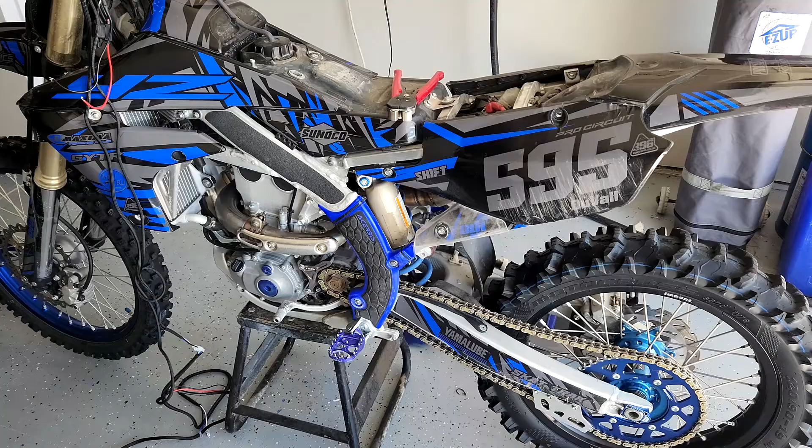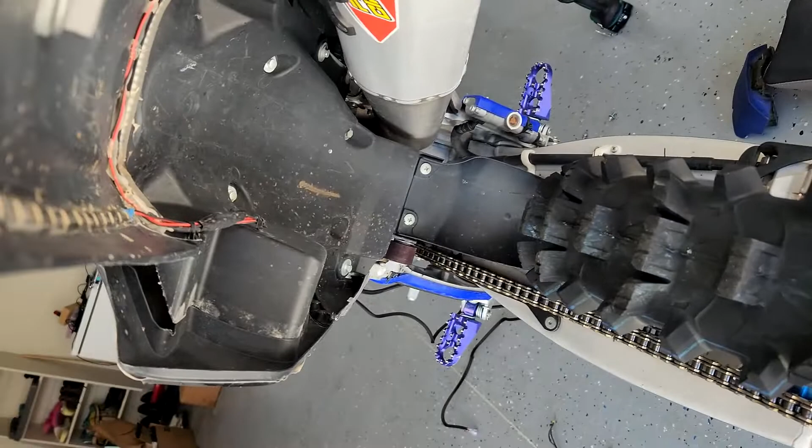I'm in the process of tearing out the old StreetFighter harness, just snipping wires and plugging away trying to get rid of that stuff. I've still got to rip out my old tail light and everything, which has held on there pretty decent, surprisingly, even at the dunes. But some of these lights are starting to fall off, so I'm basically going to go through and tidy everything up.

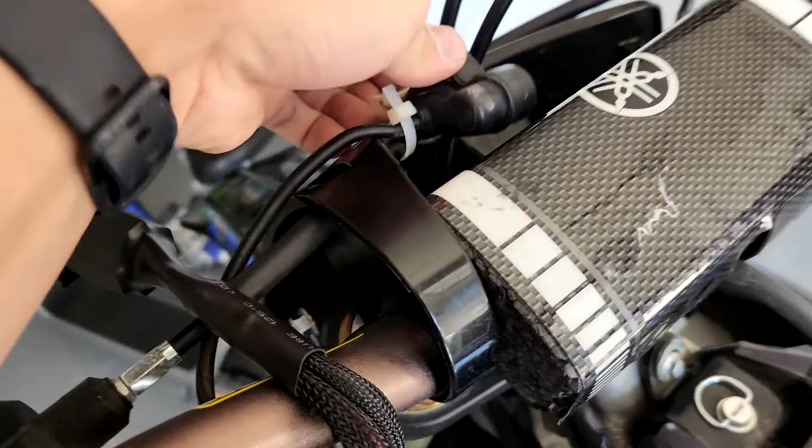Obviously this switch here is all jacked up too, the button doesn't work on it anymore. I can't turn it on and off hardly, so I just zip tied it out of the way because I was starting to run into it with my hand.

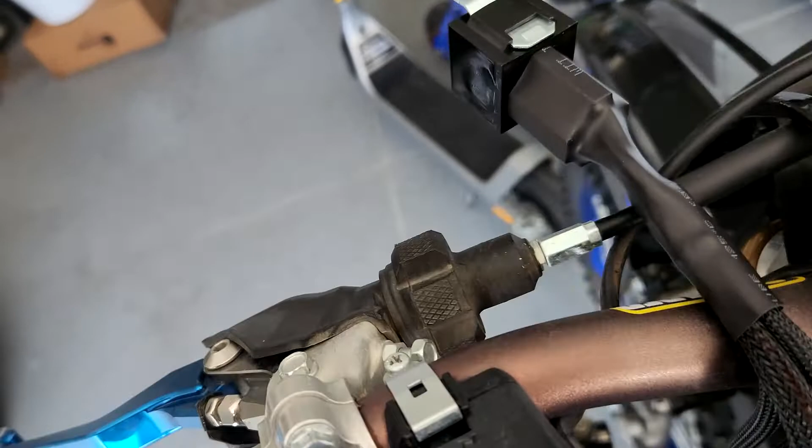There's a few things I want to improve upon that are problems in the StreetFighter kit. All of the connectors that hooked onto everything were just a rat's nest. These connectors broke off, so I had to cut them apart and solder them while I was on a ride out somewhere. It's just cheap connectors, cheap design - you can tell it's definitely just a made in China type thing.

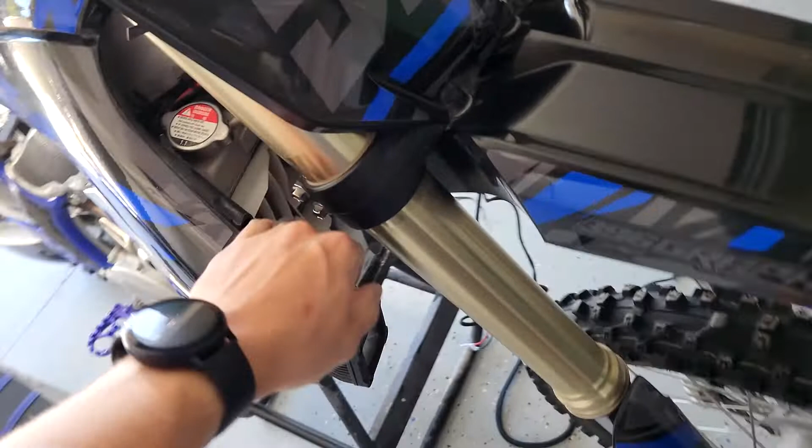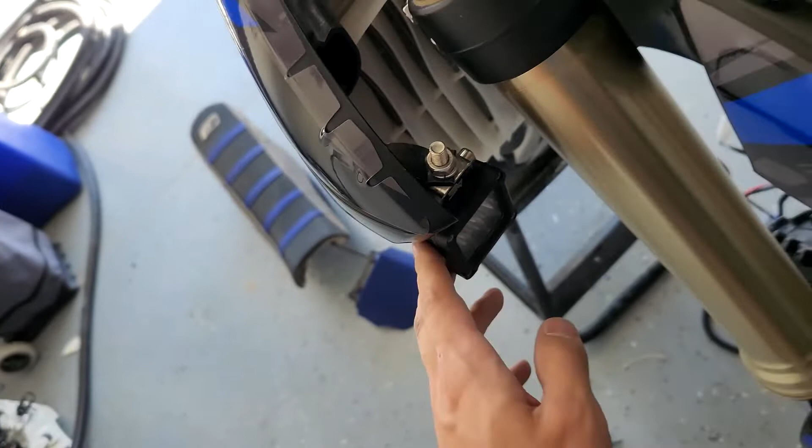So I'm going to redo it, make it look a lot better, a lot nicer. I'm going to start by pulling off everything I need to get to where all my other stuff is, like pulling off this radiator shroud. I'm also replacing these lights with something else, and I have a more permanent mounting solution than before, which was reusing the strap on these lights. After a while I've figured a few things out, and I'm going to replace everything with better components, hopefully it lasts me a lot longer.

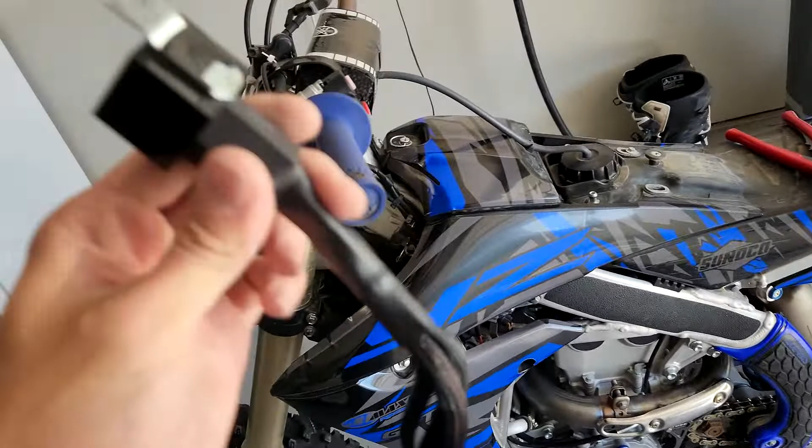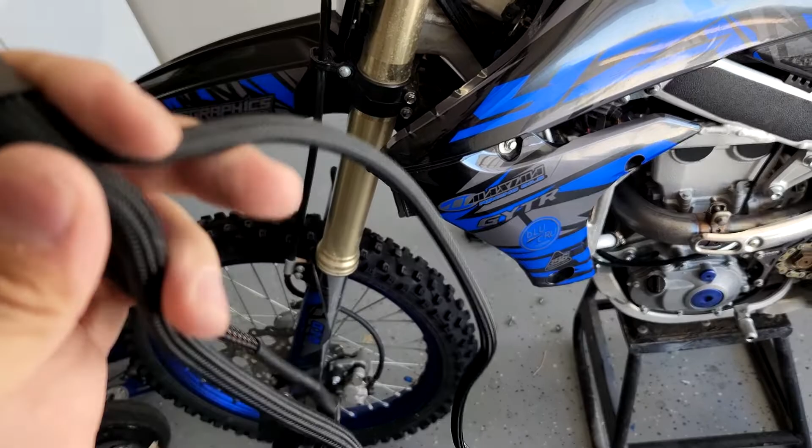This wiring harness I got, it's even got a relay, and everything's braided - it's going to be super nice. All the connectors are mostly already on there. It's a lot thicker than the other one, but it's a lot higher quality too, so I don't mind taking off an extra couple bolts to lift up my gas tank and wedge these wires underneath there to go all the way up to the handlebars.

But anyway, I'll take you along for the ride.

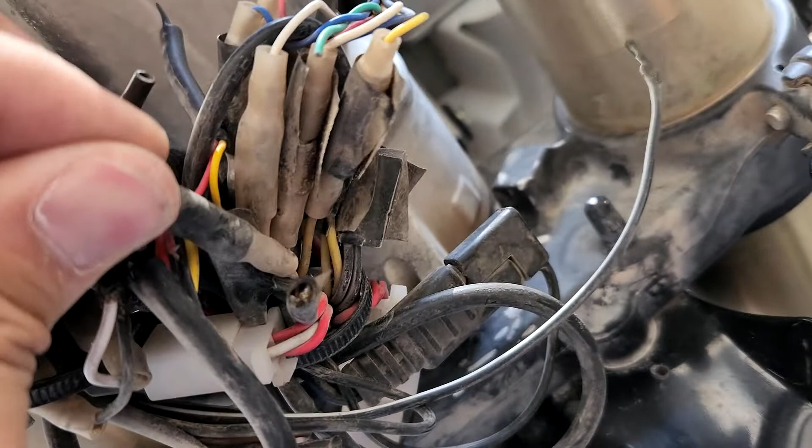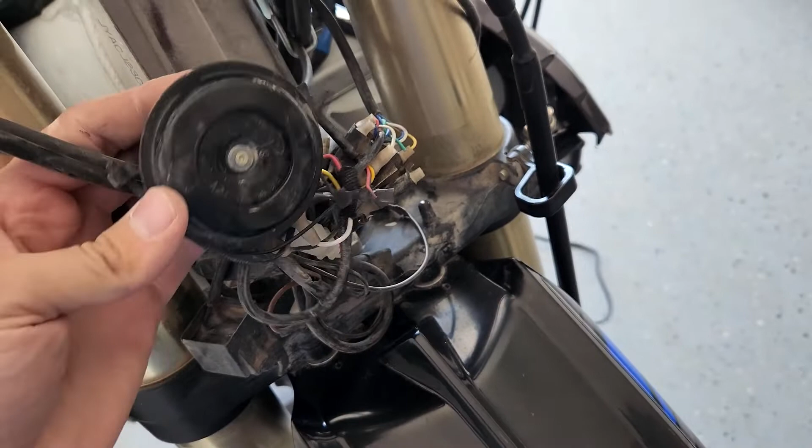This is why I can't recommend the StreetFighter harness to anybody. Look at this wire right here - these stupid bullet connectors that I had to tape together to keep them from coming apart, and it just broke right off. It's just not ideal, there's so much bulk, and it's just ugly, you know what I mean? I had to zip tie the horn on here too to get it to stay, because it broke off a couple times.

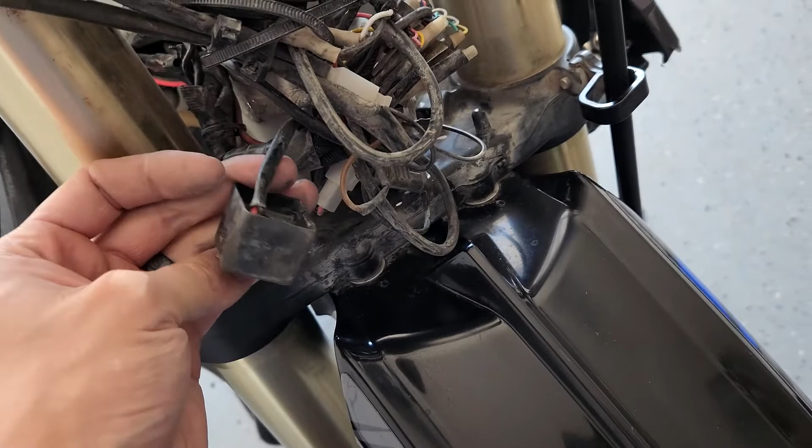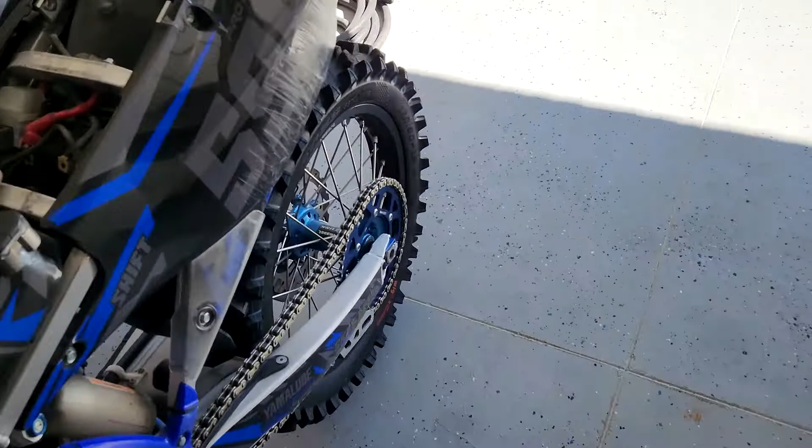Here's the relay for the StreetFighter harness, which is way up here, which honestly I don't really love, because there's a lot more space for it back there, especially on Yamahas, because you have the little compartment for the Wi-Fi box and everything right here, and the relay fits perfectly right there.

So with the new wiring harness, that's where I'm going to put this relay. This is also a lot higher quality relay - this isn't your Chinatown special, this is your normal automotive relay, a little bit better than whatever the heck this is that's got it broken, obviously. So that's why I'm going to use that. This one doesn't even have all the different pins on a normal relay like you would have - it's just got power in and negative, pretty much is what it looks like.

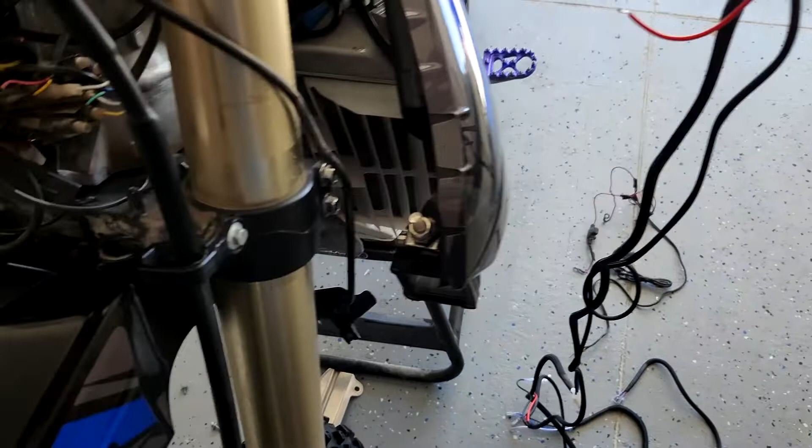I'm starting to figure a few things out here and see what I want to keep, what I want to get rid of, which is pretty much everything. So we'll see how it goes - I'm going to keep taking it apart.

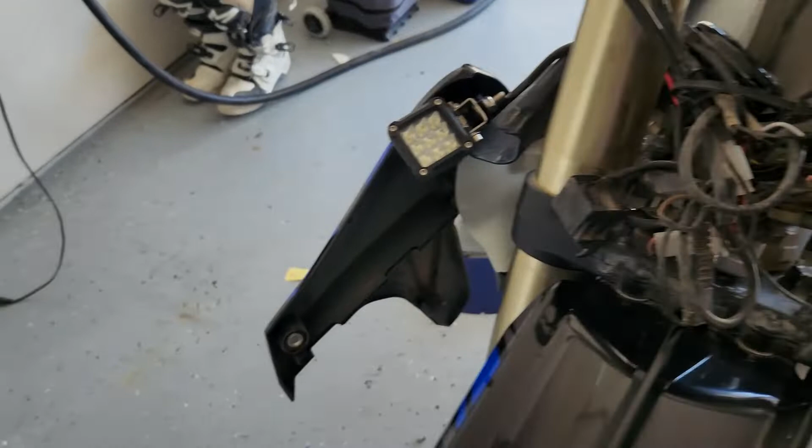I've got the shroud off, so you can kind of see the old mount and how that worked, but I don't really love that. I've got a new headlight over here that I'm going to put on it - these are little projectors, which will be a lot better for you guys that do mostly street riding. I do a lot of dirt stuff, so I might do a combination of the two or something to that effect.

These are amber and white lights, and they come with their own little brackets right here. So I'm going to put these brackets onto these, and tuck them up in the same spot kind of, but it'll be a little bit different.

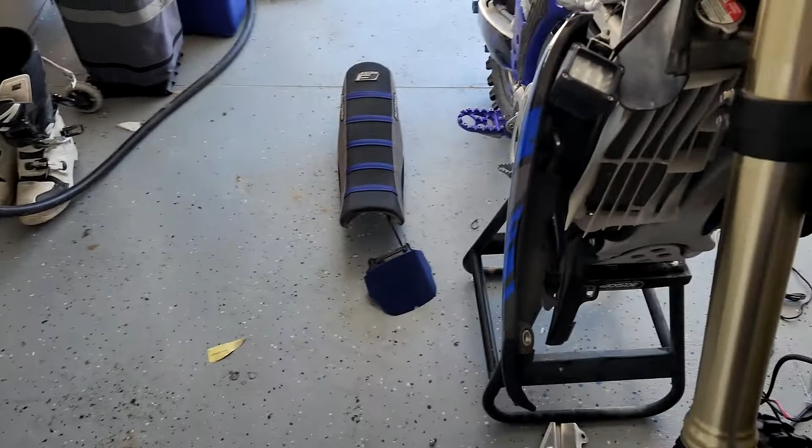It'll be more like what I did on my wife's bike, where I actually drilled the hole into this piece of plastic here, and then I trimmed the shroud just a little bit. I cut off some right here to make room for the light, and it just ends up being way more sturdy, and it's a lot better design.

Having it out like this, they just kind of flop around a little bit. If I had a better mount it would be better, but I like mounting it right here. It's a lot easier, it saves time, and at the end of the day, if you just trim a tiny bit off of this, it's not going to affect your bike at all. It's a tiny, tiny little cube light, not blocking any airflow or anything, so I'm going to keep taking stuff apart and rip all this out.

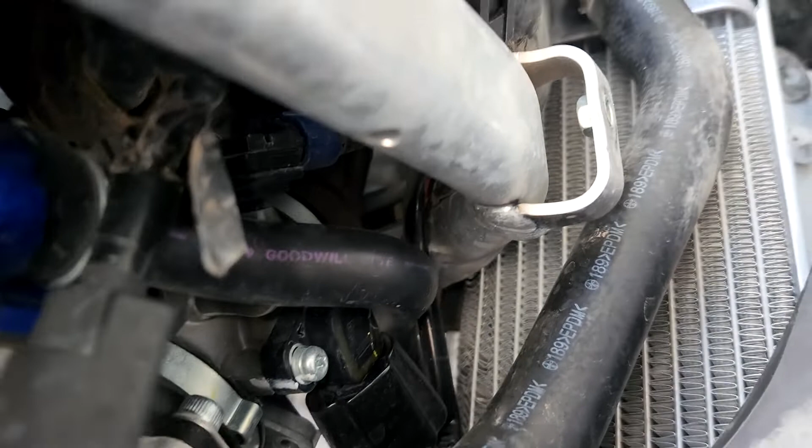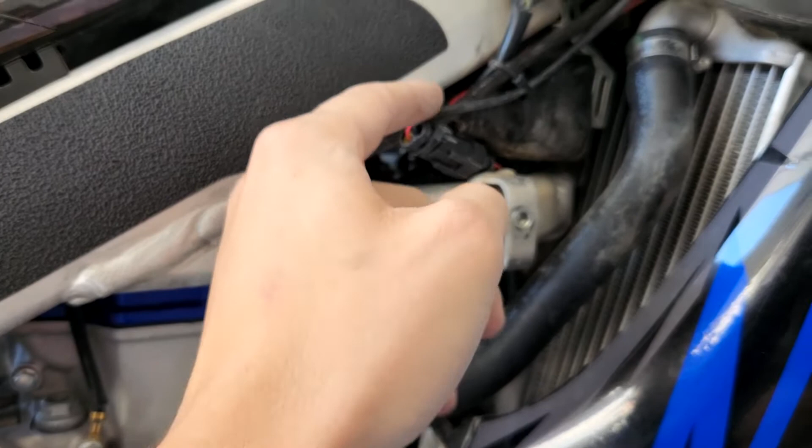I've also got some LED lights up in here to shine up on the engine. I don't know if I've shown that before, but I'm gonna find a better way to connect those instead of the current setup and see how that works.

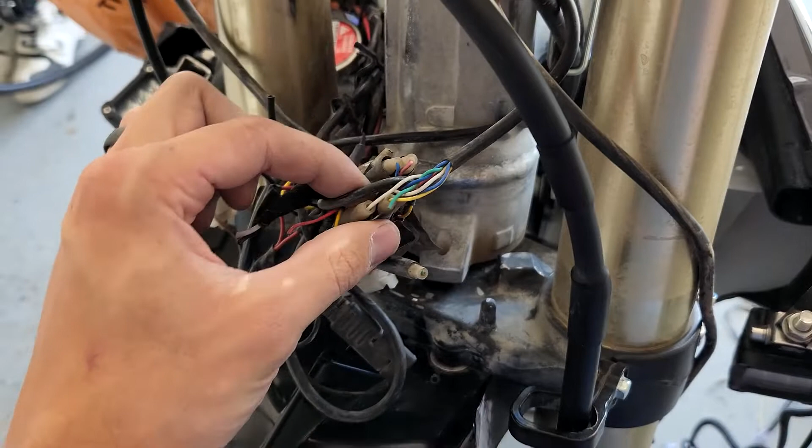Here's another example of one thing that I'm gonna hugely improve upon. All these little bullet connectors take up a bunch of space, and they're just hard to deal with because you gotta plug them in one by one, unplug them one by one.

I'm going to use a connector like this. This has 5 connections on one, and I got a bunch of these, so that's what I'll be using. It'll be a lot easier to just use that, and you plug it in once and you're done.

This also has a waterproof seal on it, and it will screw together so that they won't have a possibility of coming apart. So it's another thing I'm doing just to make my life easier and make it a lot better and a lot nicer.

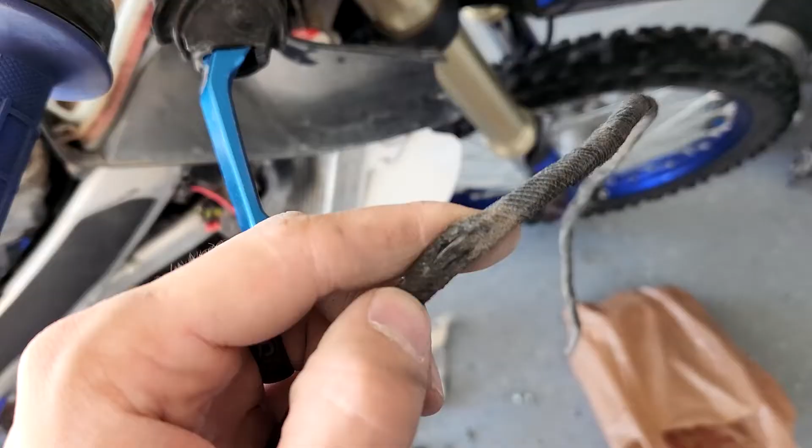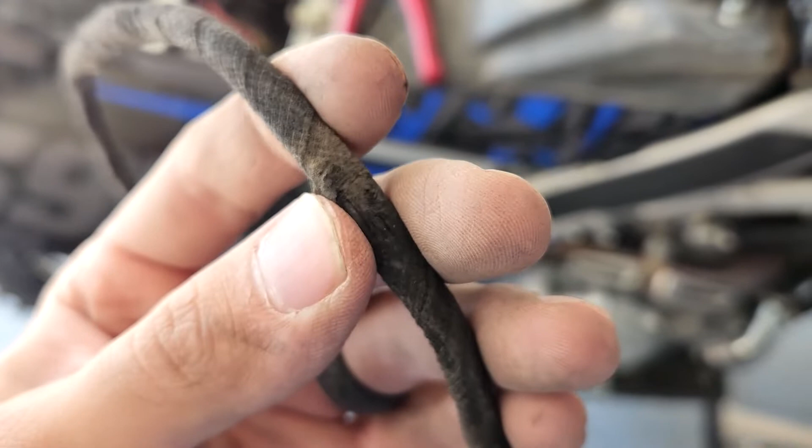Here's another example of things I want to improve on. I was pulling this out, and this is the spot that is underneath the gas tank, kind of right here-ish. And as you can tell, it almost is wearing through that wire. So I think that plastic braided stuff will do a lot better job of resisting friction and things like that instead of this weird, crappy cloth wrap thing.

So that's what I'll be doing. I just snipped everything off of it, made it a lot easier. Got that big old rat's nest out of here, so there's your before, and you'll see what it looks like when I'm all done.

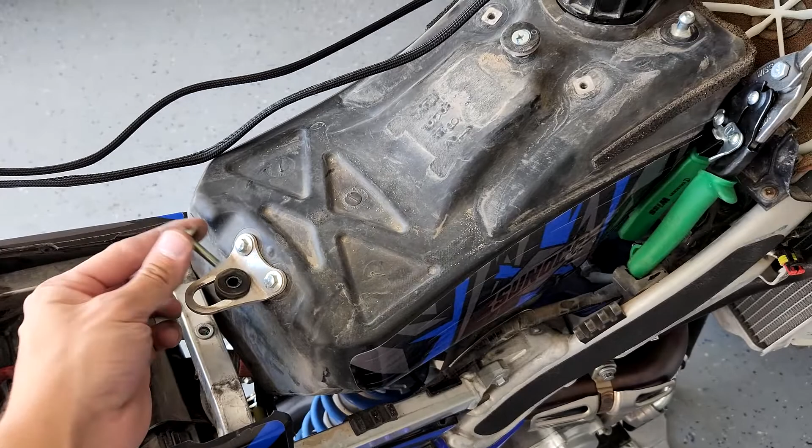Alright, on these Yamahas, to get the gas tank off, you just have to take that bolt off. It mounts right there, and then there's like a little clip thing pretty much right here. So if you just pull up on the front of the gas tank, then it will lift up, and then it's pretty much completely loose.

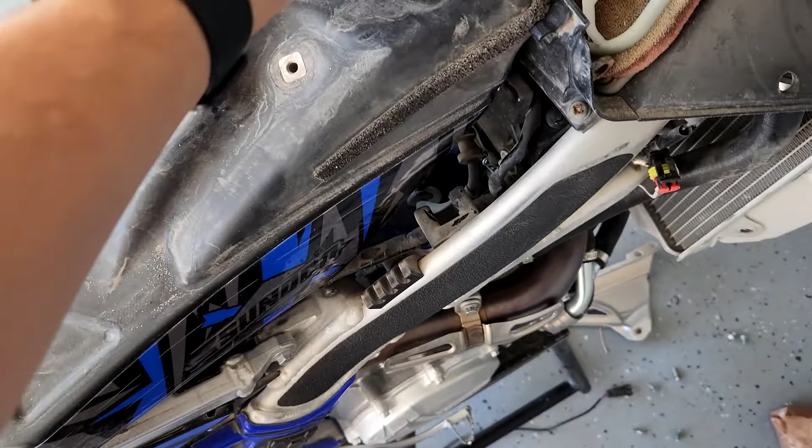Just be careful not to mess up the fuel line and the fuel pump connectors and everything. That's pretty much all there is to look out for there, but that's how you get that off. And then you have access to the stock factory wiring spot, so you can run wires the same spot all the way up to the front.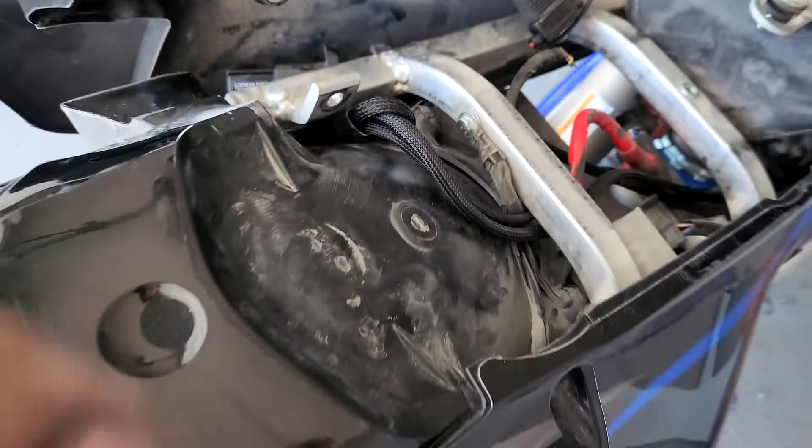Okay, I got everything through, so relays right here. Sits in that pocket right next to your Wi-Fi module if you've got a Yamaha. And then basically I ran this, which is what's going to connect to the battery. It's fused, and I ran that on the left side, and then I ran everything else.

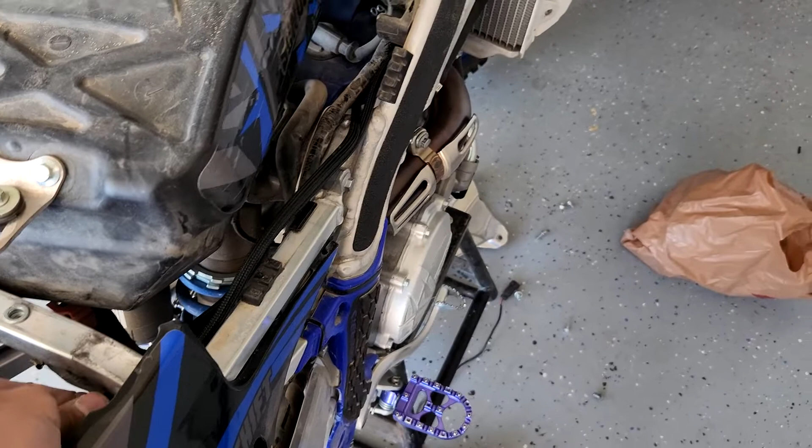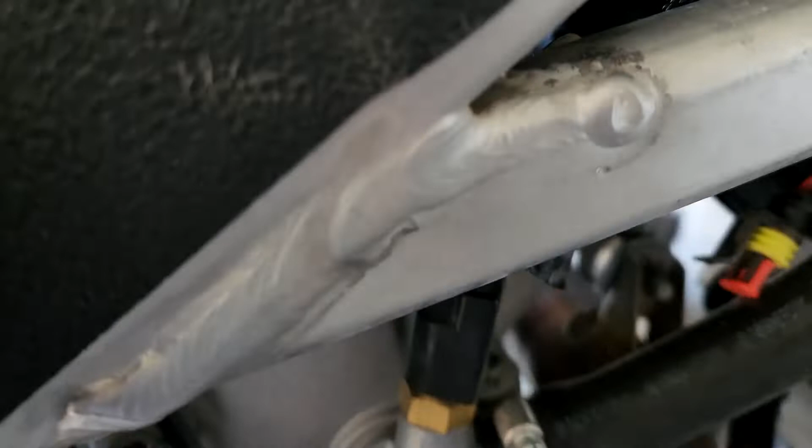There's just 2 wires on the right side, and basically I'm just going to kind of tuck it right next to the stock wires, and then it goes kind of the same path along with the stock wires. I'm going to end up zip tying all this later, but it just follows the stock wiring path.

There's some more wiring right behind it. I'll zip tie it to that, and then it goes through here on the inside of this bracket here, and then it goes all the way out the front, and it will clip in right there to that clip. And then these are the wires for the headlights right here.

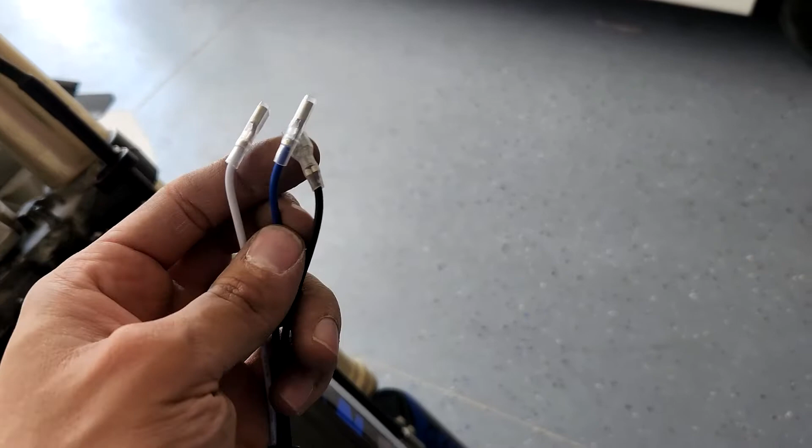So I'll just connect both of those up on either side of the bike, and this is what's going to go to the switch to power everything up. These 3 wires are going to be going into the bar switch, and this is what that looks like.

It's super simple: left turn, right turn, headlights on and off, and your horn. But that's pretty much going to be the setup. And now I just gotta get everything wired together. I still haven't really done all of the wiring on this yet, but you guys are gonna learn along with me a little bit here.

I'm getting the headlights mounted up. This is the same spot that I mounted the lights for my wife's bike. No, it's not gonna be crooked like this, I just mounted it in this spot. On the Yamahas, they all have this air intake right here, and I mounted it so I can tell how far down I need to cut this radiator shroud so that the light can sit facing forward right here. But all the connectors are on it.

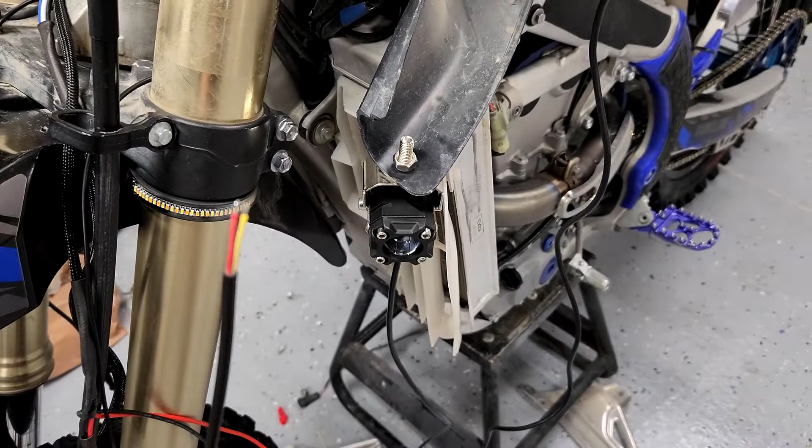Power, ground, I've got the blinkers on now. These are pretty straightforward, you just zip tie them around the fork tube. And I got this awesome waterproof connector on here, and it will not come apart, it's literally screwed together. And those are the 3 connectors that I still need to wire in so that the blinker and running light works.

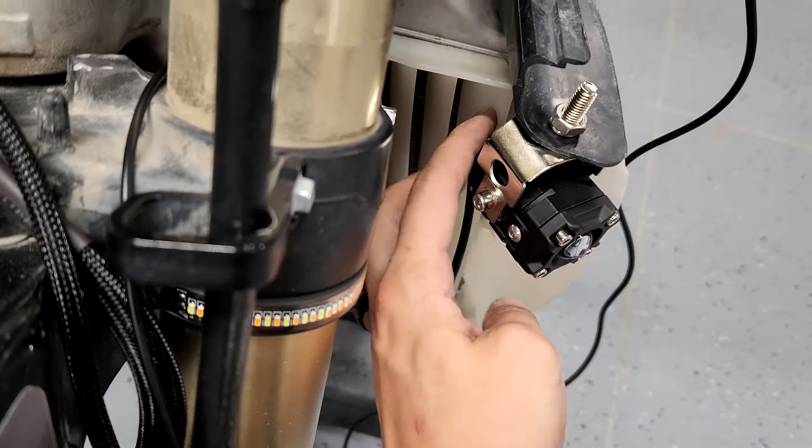But I'm getting a little bit more set up here. I'll probably need to trim just a little bit more behind as well, but it should sit something like that. When it's done, I'm just gonna cut off a little bit of this outer one so that it doesn't push it up or down, and I don't want to be pushing the back of the wire either, so that's why I'm gonna be trimming that up. But yeah, that's pretty much where I'm at right now.

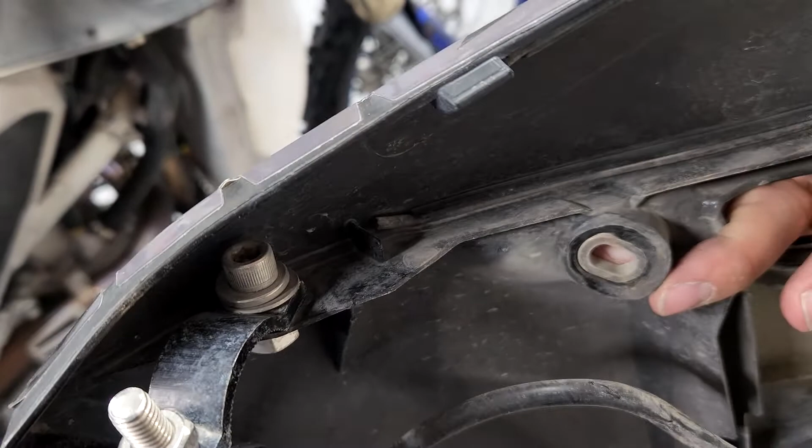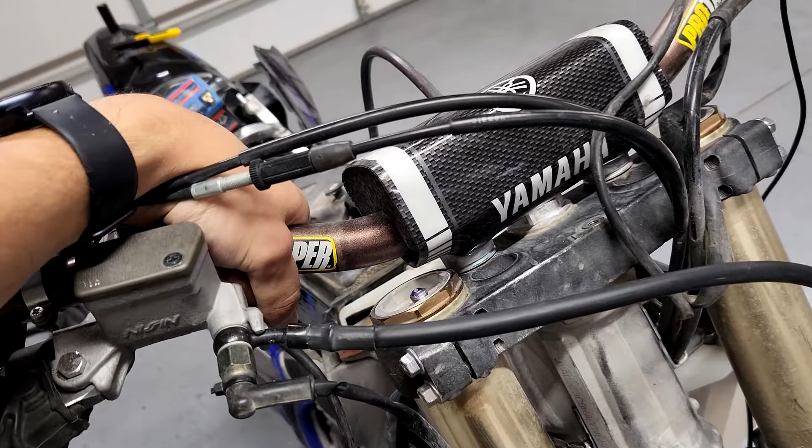If you're gonna do this yourself on some newer bikes of other brands like Kawasakis and Hondas, most of the plastics on newer bikes have this little tab right here that you can mount lights to if you need to. This is the original one that I did. So if you have to and can't do it any other way, you might find a spot like that. Or another option is to find some clamps and mount them onto the bars, which is honestly probably the best option. I don't really like the look of it, but that's the best option because when you turn, your lights follow your bars, which is super nice.

But the floodlights that I had before worked good enough for me to see. These are little projectors, so they'll be a little bit different, but I'm hoping they still throw enough of a wide beam to see where I'm going, but I also like to have them hidden. It's kind of up to you where you want to mount your lights. You can even mount them off of these clamps here. If you found a little mount that's the right size, or if you made one, you could do that. There's really a bunch of options.

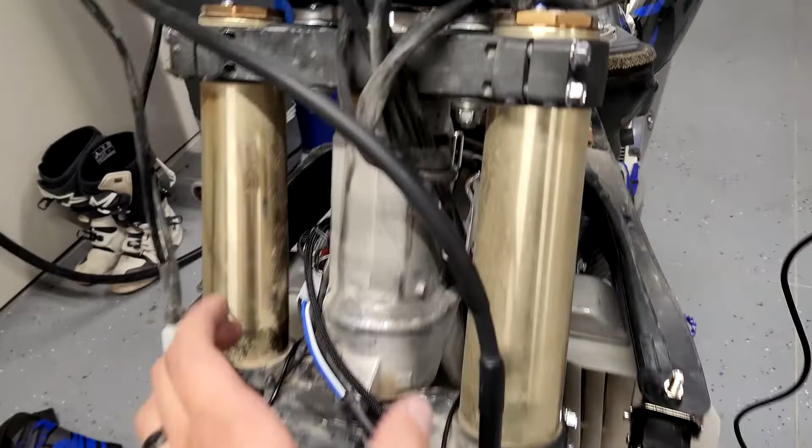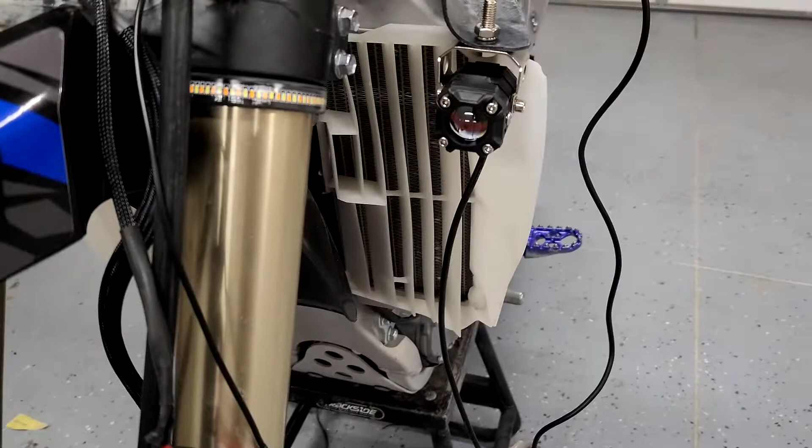You could cut a couple holes in your number plate and mount them like that. You can even run a bolt through these forward handlebar mounts and then cut a hole in your plate if you wanted to do that. But I just like the clean look of having them right there, I think it looks the best. When I'm all done, you'll understand why I think that's the best route.

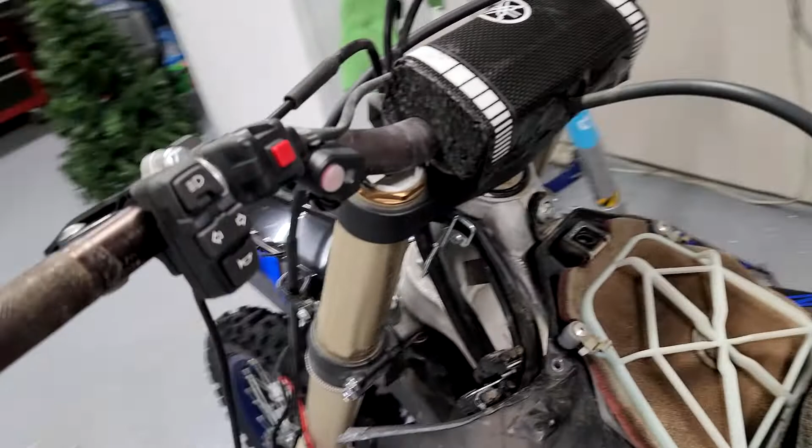But yeah, I'll keep you guys updated as I keep moving on here, but just got a lot more wiring to do, and then I'll be able to show you the finished product.

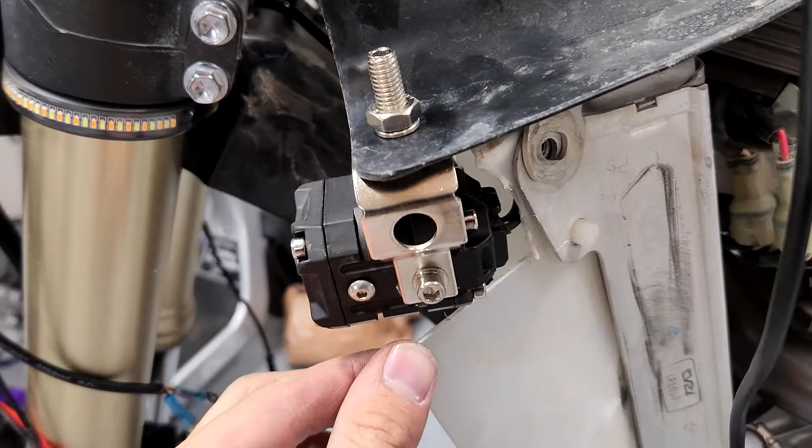Both the lights are mounted up. All I did was trim out a little bit of this guard here and a little bit off the back. And then I also drilled a hole through it on the top for the wire to go, and then it goes around with these other ones through the metal clip right here.

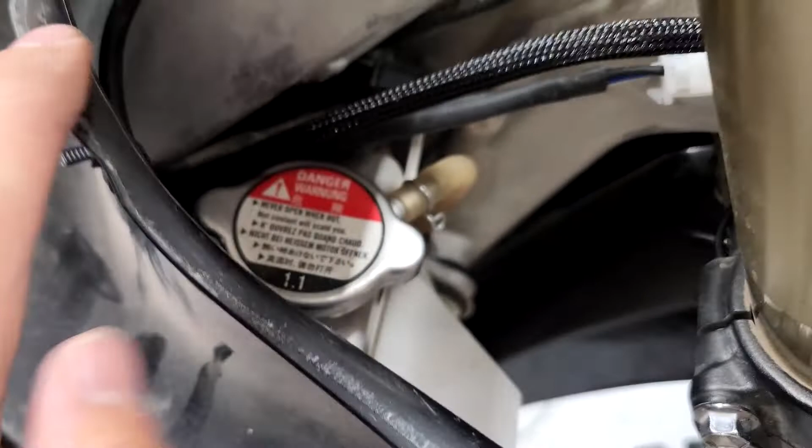And on the other side, I did pretty much the same thing, except I wanted to keep it off of the radiator a little bit right here, so I just threw a zip tie on that. Just drilled a couple holes, and then that wire is zip tied on this side, and then it loops around, goes through the same spot, and they will both end up right here on the front fender, and I'll plug them right in. But that's the final spot they're gonna be.

And these also have room to move up and down. This looks flimsy right now, but that's because nothing is bolted onto it holding it. Once the shrouds are back on, it makes it a lot stronger, and they don't really move around at all.

My previous setup rattled around a little bit just because it wasn't supporting the weight of the light directly from above, which is a lot better. So anyway, that's how the lights are gonna look.

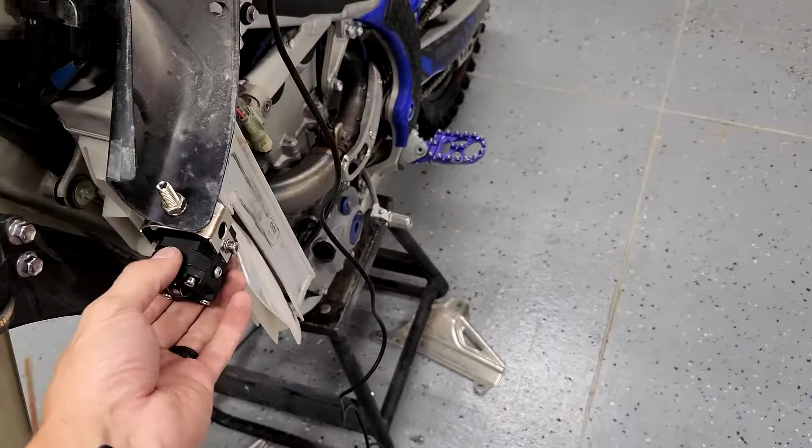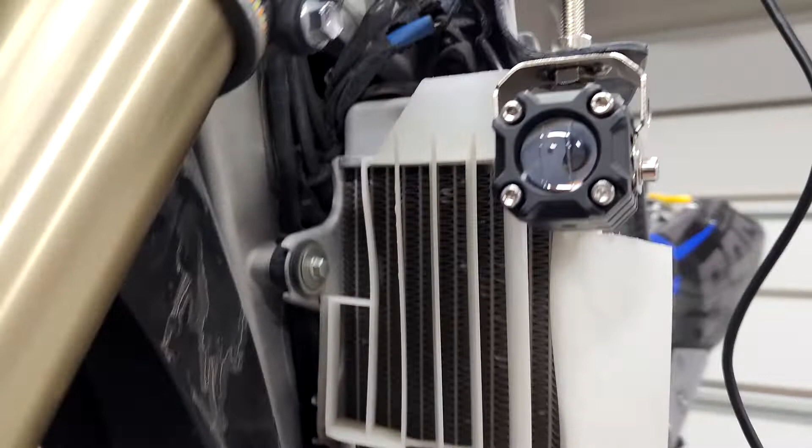I'm still trying to decide if I want to put a floodlight on the bottom of that, because there's another spot where I could thread in a floodlight like the ones I have now, and then I could technically have dual pods right there and they'd both be hidden. So I might do that in the future. We'll have to see how bright these little guys are, or I might just go back to the floodlights. But we'll see, I'm gonna give it a shot and see how much I like them.

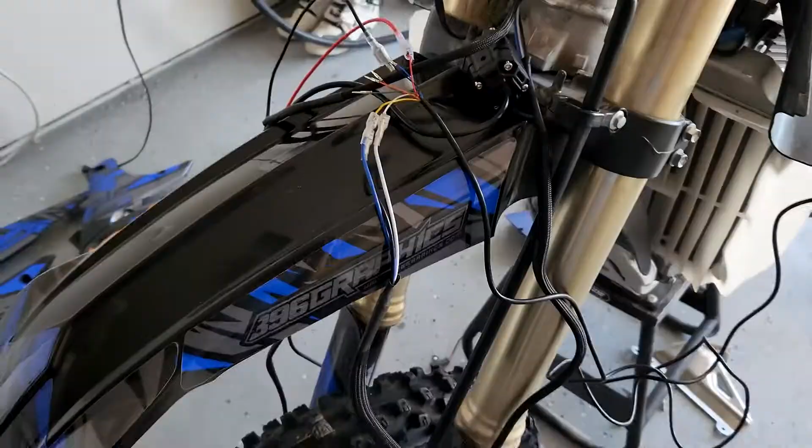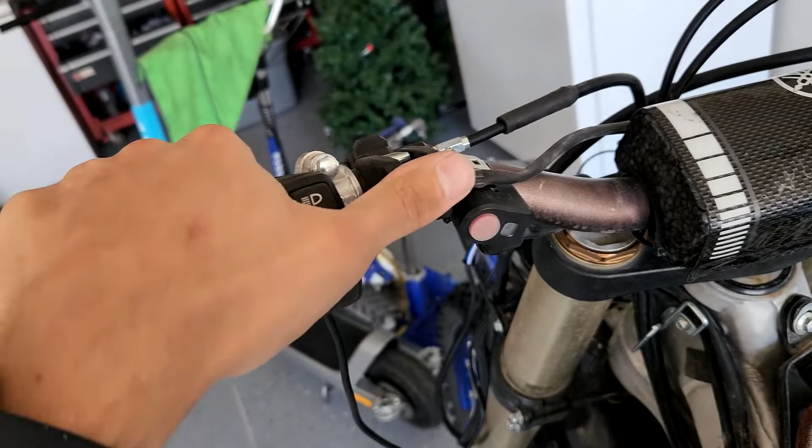Trying to figure out exactly how I want to wire this up. On the switch up here that I mounted on the bars, by the way, you're gonna need new grips, because to get this on you have to take off the grip since there's no slot on it. I also relocated the kill switch farther over because I don't really use it as much as I would if I was riding it on the street.

But anyway, got everything pretty much wired up. So there's the light, and the indicator comes on when you press it, and that activates the relay and turns on the whole system. And then you've got your left blinker, right blinker, and the horn.

Basically I'm just testing all these wires to make sure that I'm plugging it in right. So this is positive for power, negative for ground, and that goes into the switch to power all the blinkers and everything like that. That's just tapping into the relay power that's going to be for the headlights as well. So basically, as soon as I turn on that handlebar switch, it activates the relay using these two wires here. This one is just for an LED indicator that was on the old switch, but I'm not going to be needing that, so I'll end up capping that off.

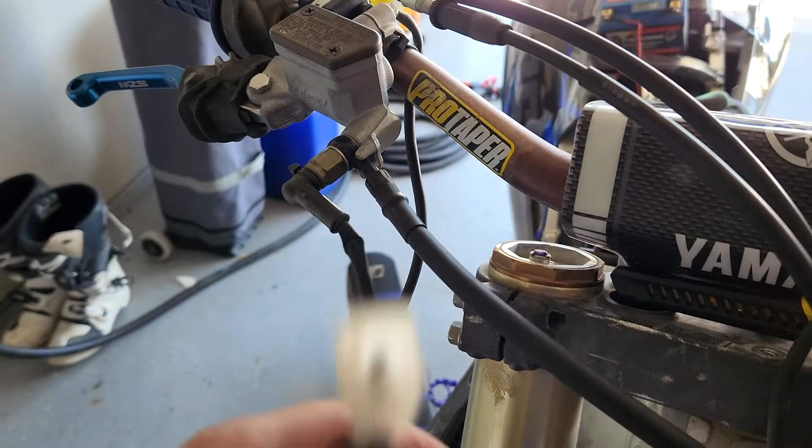Basically that's positive, negative, and then the rest of these wires are going to be for blinkers and also for the tail light. And then I've got my banjo bolt right here, which I will also include in the kit, and that will control the rear brake light. That's just a pressure switch off of the master cylinder, so that's how that's going to work.

But I'm pretty far into it, but that's pretty much where I'm at for now.

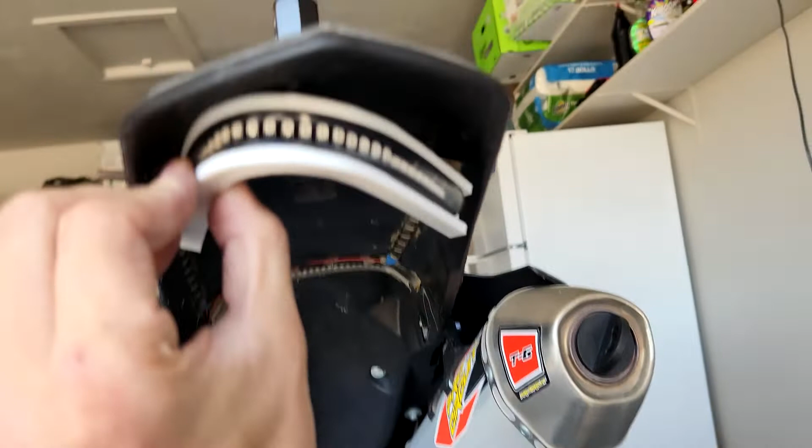The idea is there's these mounting spots, and you can either rivet it in, screw it in, whatever, but it's basically going to fit in there just like that. This is just the prototype design. I'm going to end up making it a little bit taller so that it sits more like that, and I'm going to make it fit the exact cut of the fender so that it looks nice and clean.

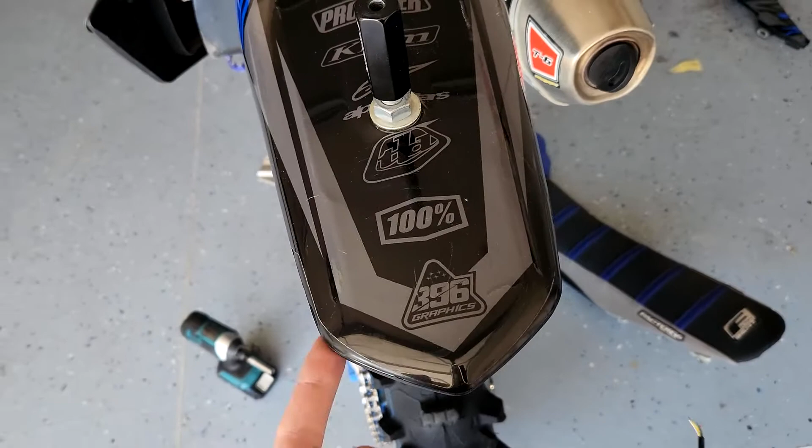If you have a different brand of bike like a Kawasaki or KTM, what you can do is heat this up with a heat gun, and it will bend into the shape you need. But if I make it for the Yamaha, it should be pretty close for everything else. Everything is a little bit different, but they're pretty darn close in the rear, so that's what I'm going to end up doing.

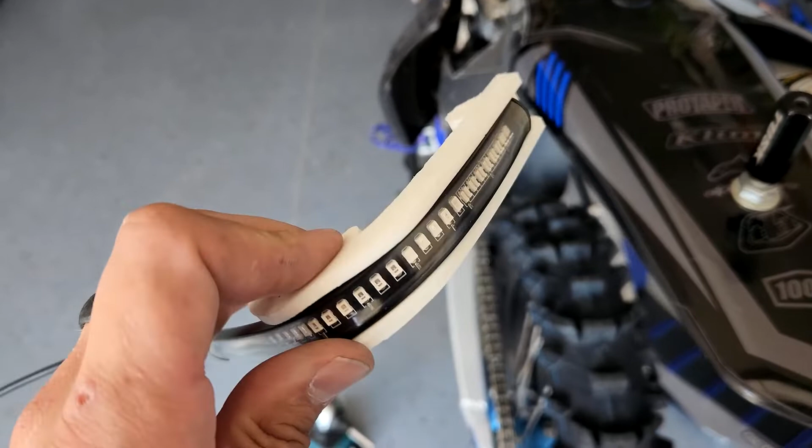This was actually not nearly bent this much, and I just bent it with the heat gun and a little bit of time, but it fits the light perfectly, and the idea is that this will keep out any dirt and water and things like that that will keep this from sticking.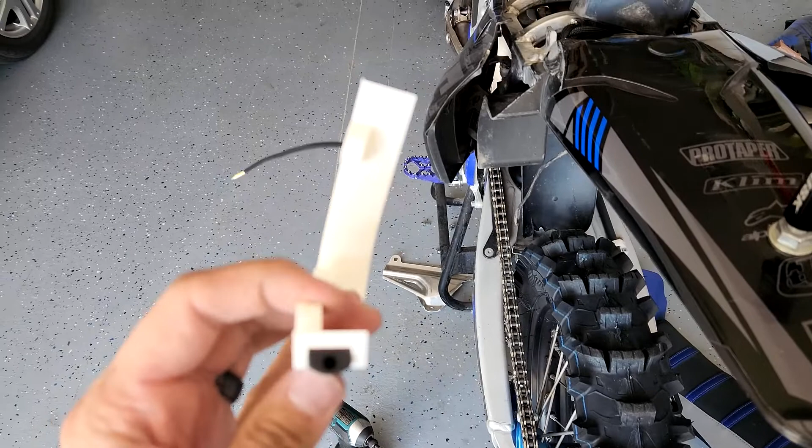So you can glue this in here, or you can just use the double backing tape, but personally I think it's better to find another way to glue it in there other than just the tape. The tape is okay, but it doesn't really hold that well. Another option would be to just run a piece of something over this to hold it in nice and tight.

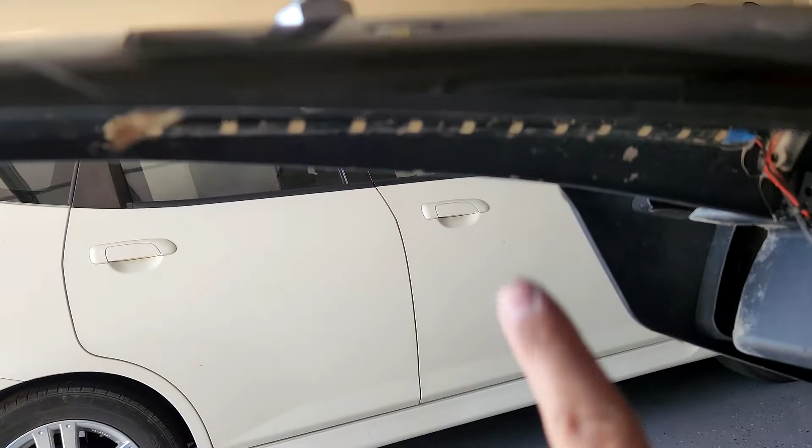I might end up doing something like that in the final design, but anyway, that's pretty much where I'm at so far. I've got the battery wired up just temporarily to test everything, and everything seems to be working fine. Now I've just got to finish up the tail light, and I need to rewire my little blue LEDs that I like to have on when I'm at the dunes and whatnot. I've got a lot more wiring to do, but I'll be testing everything out.

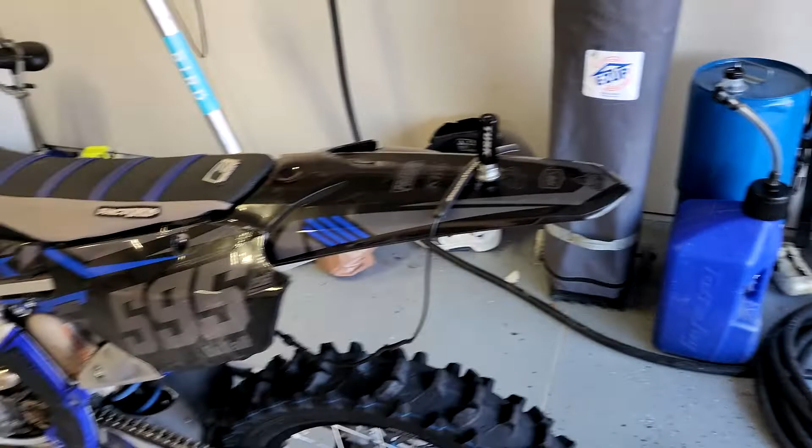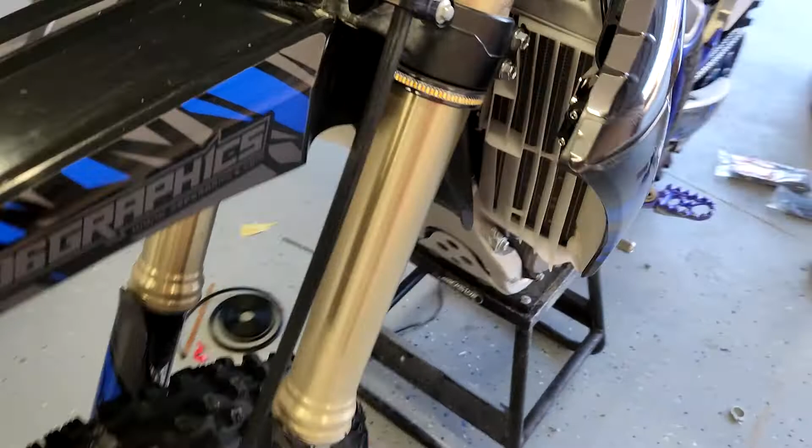It's all back together. Everything's on. I just still need to wait for my 3D printed piece for this, but it all works. Everything's all wired up, and it's all hidden right behind the number plate. Fit in there no problem. And there's the headlights hiding right in there.

If I turn everything on, this is the switch. That's your power, and that turns on the headlights and the brake light and everything. The brake light does work. There's your high beam thing for the brake light. And left turn, you can tell it's working, then it switches back to white. Right turn, same thing, then it switches back to white. And also on here it shows you what is on and off, which is super nice.

The horn, don't really want to hit that, but it works. You just jam that and the horn will go. I have the horn mounted right here off of this same bolt, so it just sits down in there.

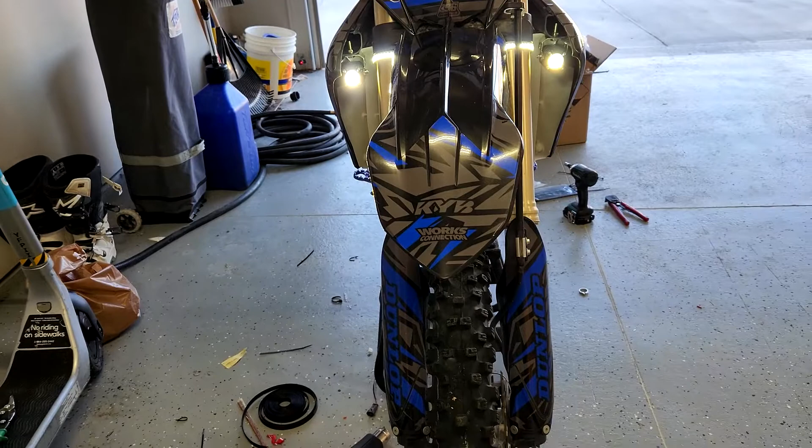This is what the headlights look like right there, just hiding. And they're like projectors, so they have a nice clean cutoff on the wall, you can kind of tell. It's pretty bright, and I'm pretty happy with how that turned out. I'll have to take a video of what the lights look like at night.

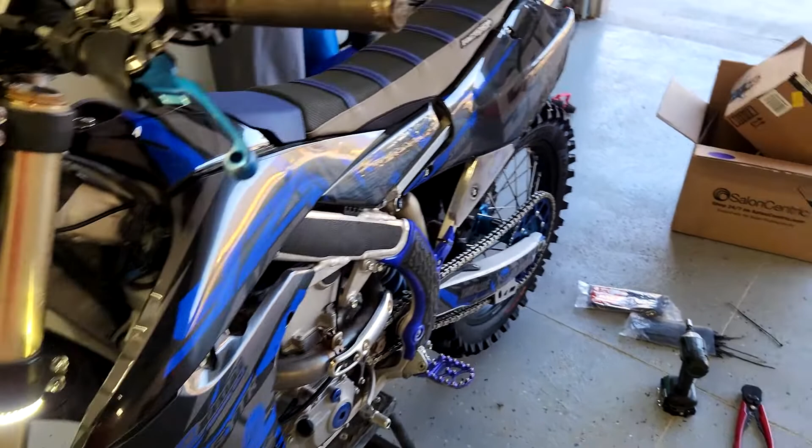But yeah, that's the whole kit. It's pretty easy. It took me a lot longer because this is the first one I made, but for you, all it would be is run the wires from the back to the front, plug everything in, and you're done. Super easy. It'd probably take you maybe an hour to do it.

That's it, that's the whole kit done. I'll 3D print that tail light mount, and then I'll post another video. That's what the headlights are gonna look like. I just measured and made a little template for the 3D printed thing I'm gonna make. Pretty easy, straightforward.

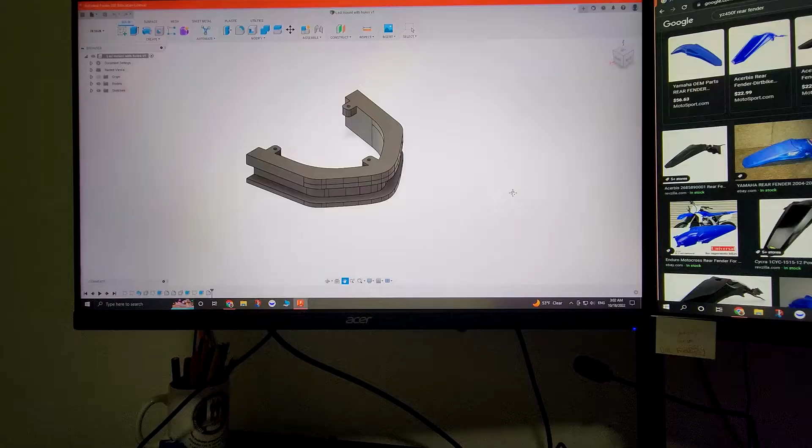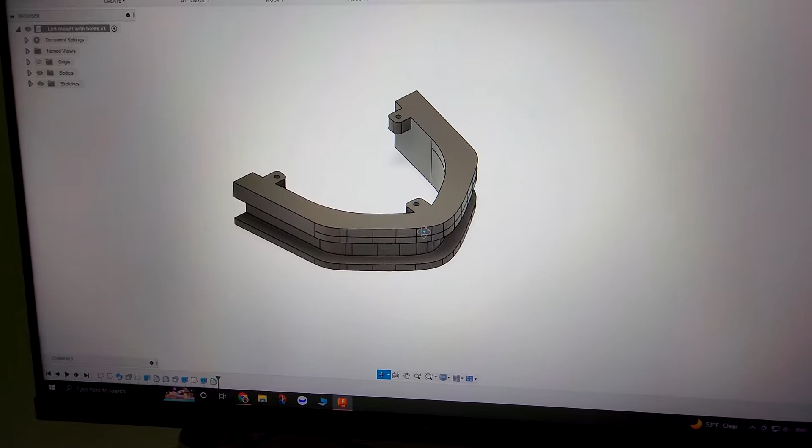Okay, here's the final prototype, I guess is what I would call it, of the mount for the LED tail light. Basically, the light will sit inside of that channel there, and this is thicker on the top just so the light can sit farther down, because for example on a rear fender for a Yamaha there's a little bit of a lip on the inside, so I wanted to be able to see all of the light. Or if you wanted it closer, you could shave a little bit of that top off and tuck it under there, or I could just have two different options.

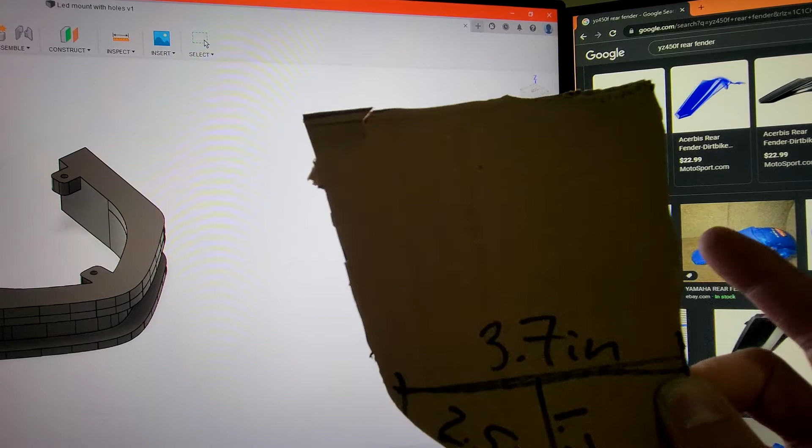Basically I traced the outline of the fender with a piece of cardboard, and I measured how wide it was, how far to the point, and how long each one of these sides was to get the copy. I did this on the inside of the fender, but I traced the outside of the fender with the cardboard, though these measurements are from the inside. With that, I was able to make that model, and this is the completed 3D printed piece.

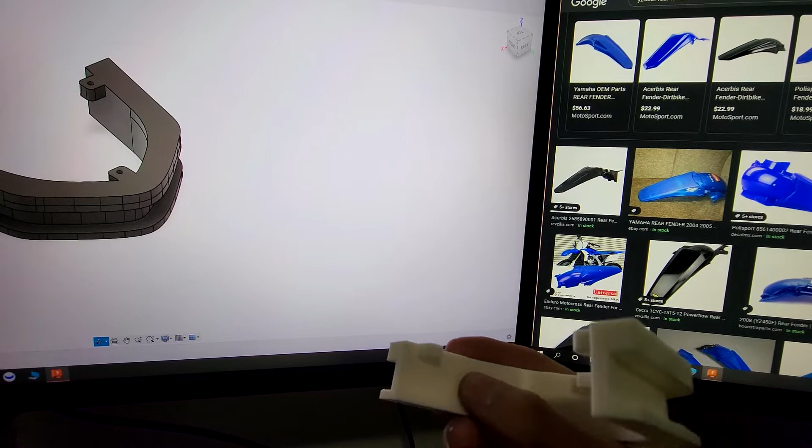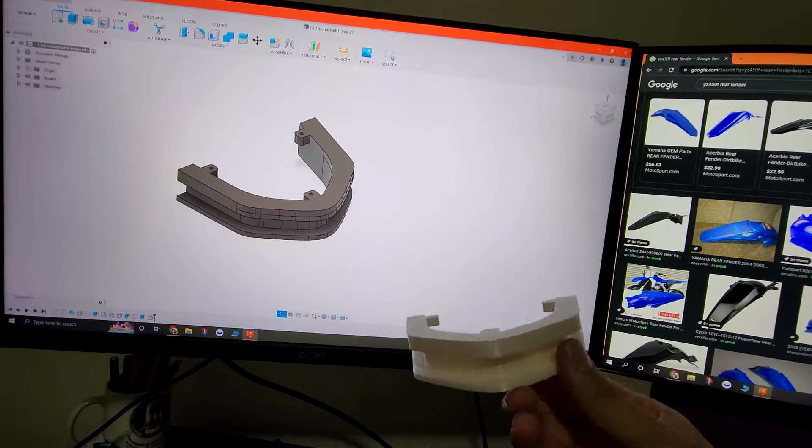I was also thinking about putting some blue LEDs on the back side of this, inside here, to light up the wheel and stuff, but that's what it looks like, and it should fit perfectly onto the back of the fender. I used my 3D printer to do this, and it will be black when I actually put it on the bike, but white is the filament I normally use just to test things out and see if they're gonna fit well or not. That's how I did it.